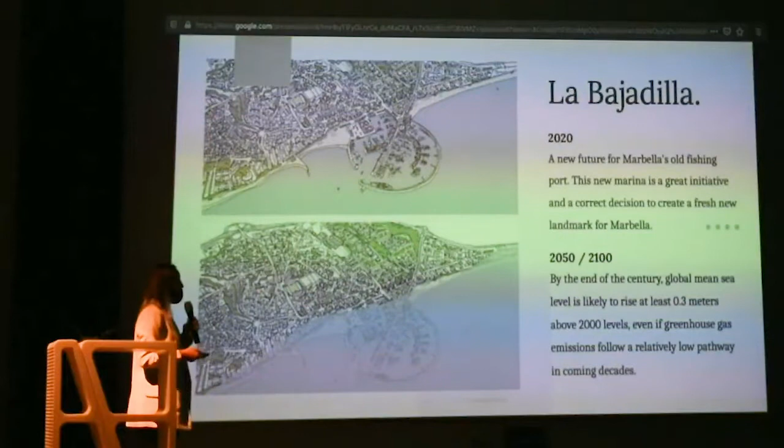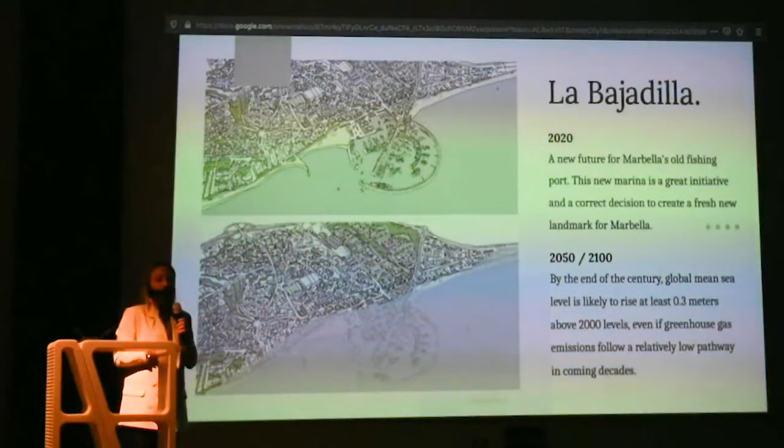One thing that affects this new development in the future is climate change, specifically sea level rise. By the end of the century, global mean sea level is likely to rise at least 0.3 meters above 2000 levels, even if greenhouse gas emissions follow a relatively low pathway in the coming decades. 0.3 meters may not sound like a lot, but for the coast of Spain and throughout the world, it will create major damage.

Sea level rise is affected by CO2 emissions, higher atmospheric temperatures, melting glaciers, and water expanding when it's warmer. The average temperature now, in 2020, is 28 degrees. In 2070, it will be 33 degrees, and in 2100, which is my goal and focus year for this project, it will remain around 33 degrees Celsius.

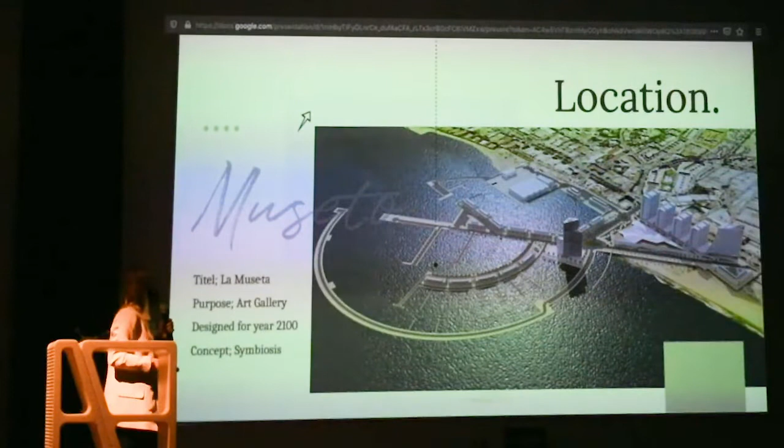I chose my location on this plot carefully, thinking about climate change and sea level rise. I chose a plot that is 10 by 30 meters, located at the end of one of the port's arms. The purpose of this building is an art gallery.

I chose art gallery because art has always been within human existence—think about cave drawings, for example. Art in 2100 will be something completely new: we will walk into the art, creating a completely new connectivity between the artist and the viewer.

The future is uncertain, so we have to prepare for many different possibilities. One thing is certain: art has always and will always be about creativity, connection, and communication. The more social we are online, the more we will crave human offline interaction and storytelling that art delivers. Therefore, I believe art and gallery exhibition space will be part of this future, also preserving history.

My concept is symbiosis. I chose this because I wanted my concept to connect with sea level rise and our location by the coast, so I chose coral as my concept. Coral reefs are very dependent on climate change—they will not survive if the water gets warmer and pH levels change.

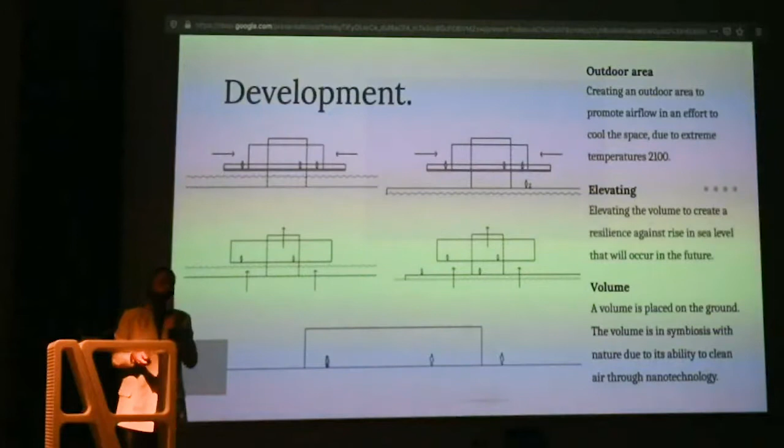For my development, I started with this 10 by 30 plot located on the ground. But because of sea level rise, we have to elevate it, making this building resilient against that end result. I'm also creating an outdoor area which promotes airflow into the building and opens up for viewers to look outside as well.

Further into the development, I'm also opening up the middle part of the building, where you transition from ground floor to first floor, to create a more open, airy environment. This is where my symbiosis concept really shows.

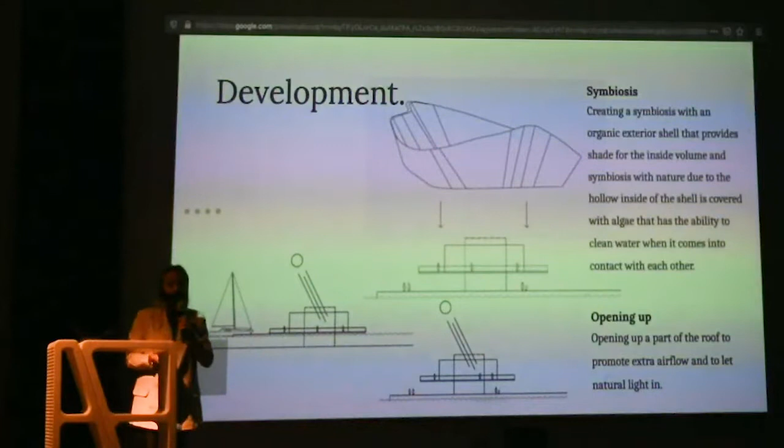Because of the hot temperatures in the future, we don't want to be exposed to the sun, so I created a shell that will surround this linear structure inside. Here you see the symbiosis between an organic shell and a linear structure—contradicting in form, but working together.

This shell will also host algae inside this hollow space, which will have the ability to clean water and create a live wall, or a live water filtration wall.

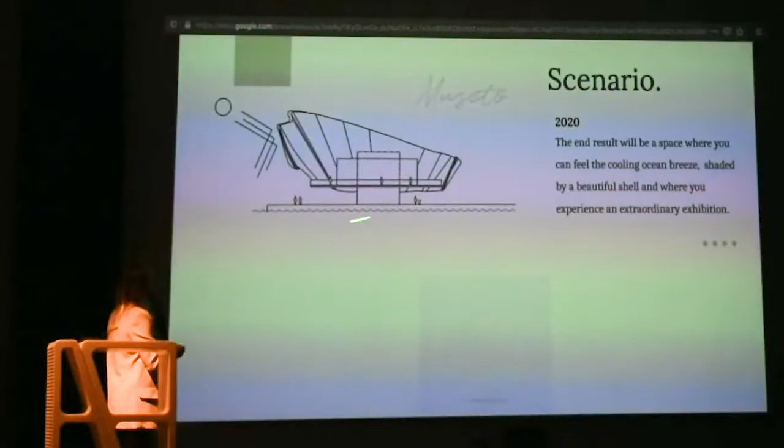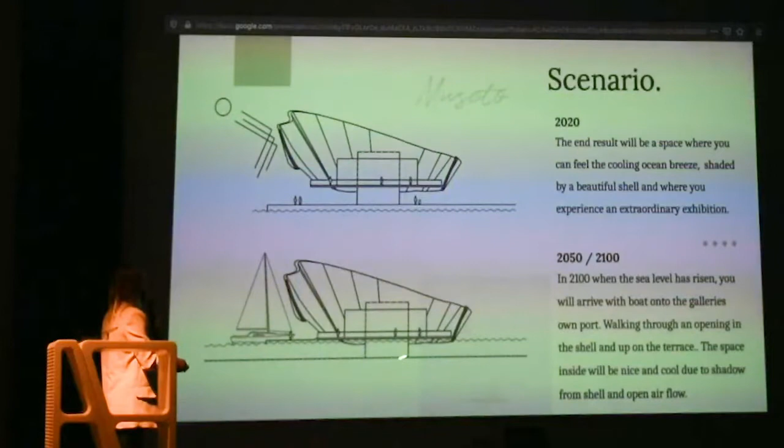Looking into different scenarios: in 2020, the sea level will be below, and you will still have the port and enter underneath. But in 2100, sea levels are rising and you won't be able to utilize this bay space because it will be submerged, so you will enter through an additional dock instead.

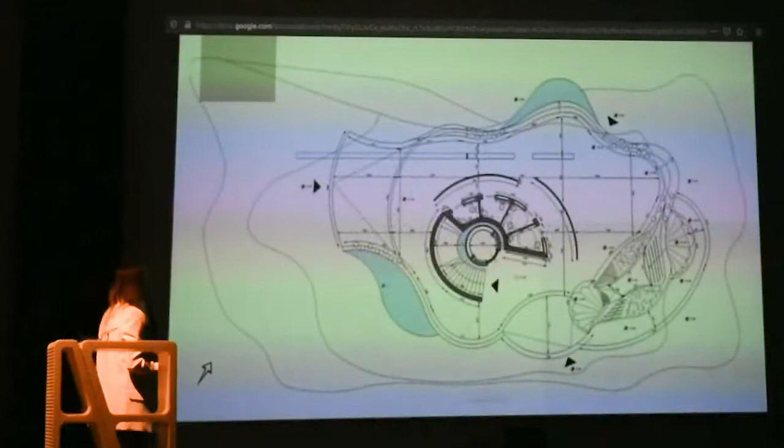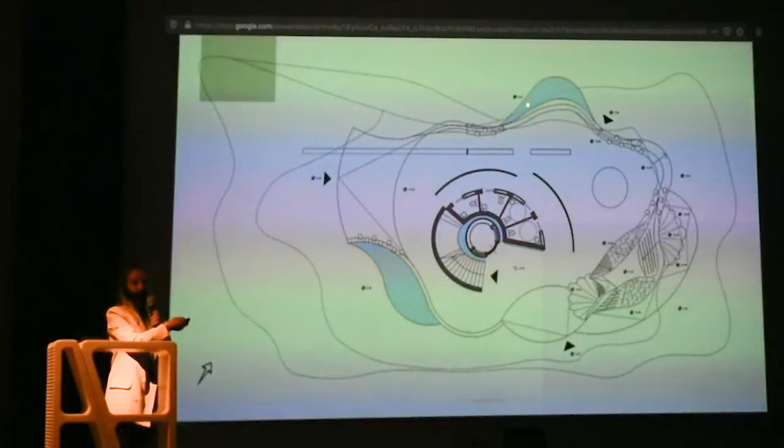Going into my building, coming from the port, you will see a curved structure around the building, almost like carved-out steps, created with seating and playful ponds that reflect the surroundings. You will actually walk past the building first to see it in its surrounding elements, and then walk into the main entrance.

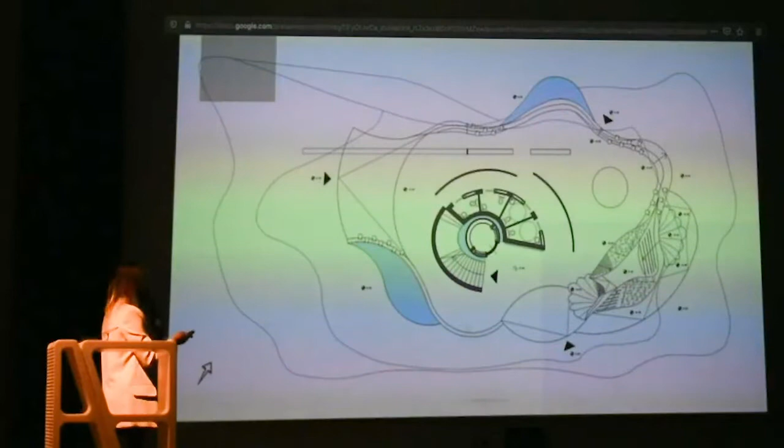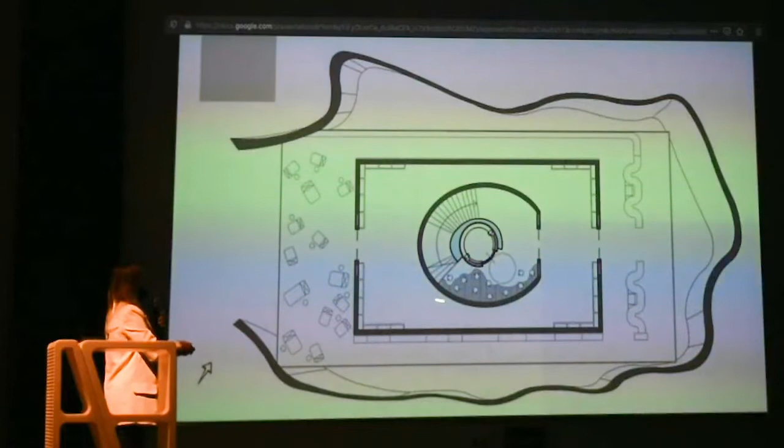You walk around in a playful setting with public bathrooms and a playground, then walk up the stairs or take the elevator to the first level. Entering the first level, you find yourself in an organic curved room with an open ceiling and a lot of seating.

From this room, you exit into a very linear, squared room, with two exits leading to the terrace area that goes all around this inner space with different kinds of seating. You can enjoy the view down to the plaza and the shell, and later a panoramic view of the ocean.

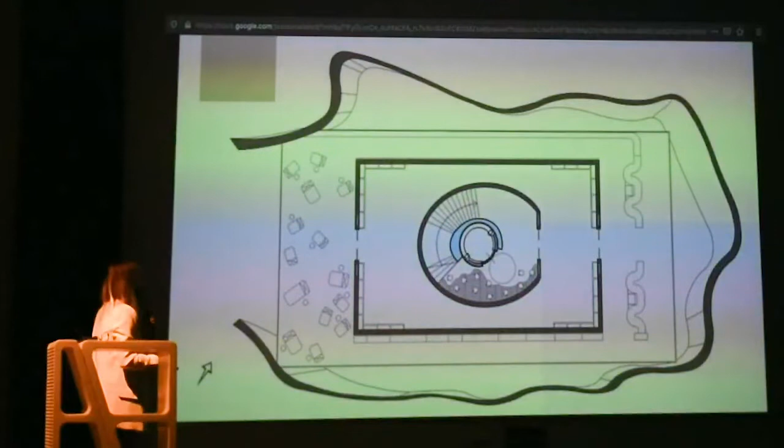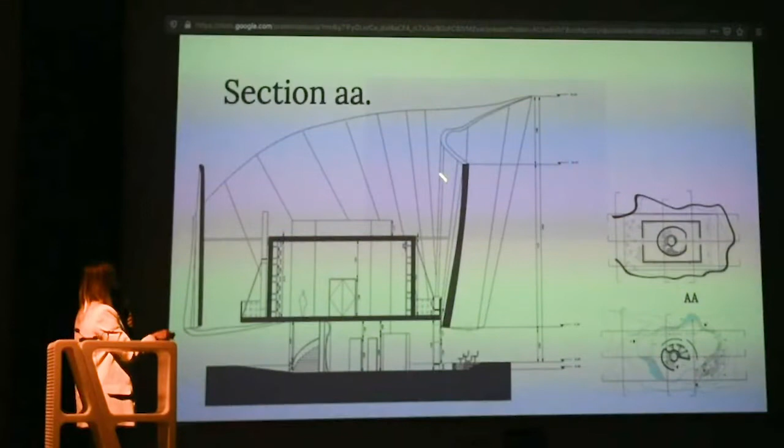In this image, you can really see the difference: going up the stairs, finding yourself in the linear squared room, and then going out to the side of the terrace, where you enter a whole different space with the shell around you.

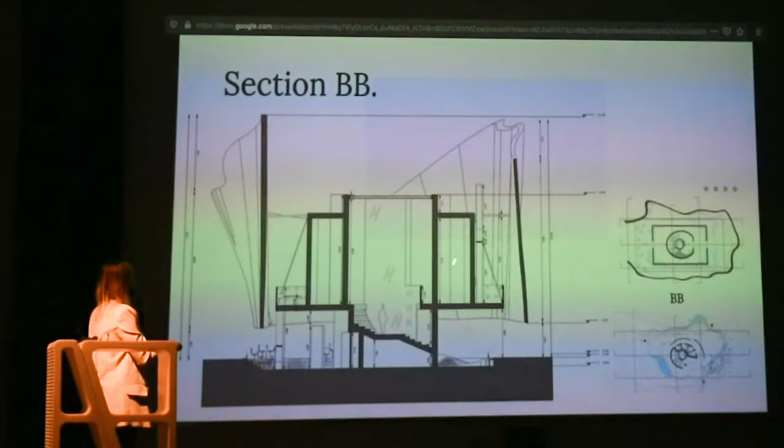This shows going from this open high ceiling into this squared room with lower ceiling height, creating a different perception of space as you walk through the whole building.

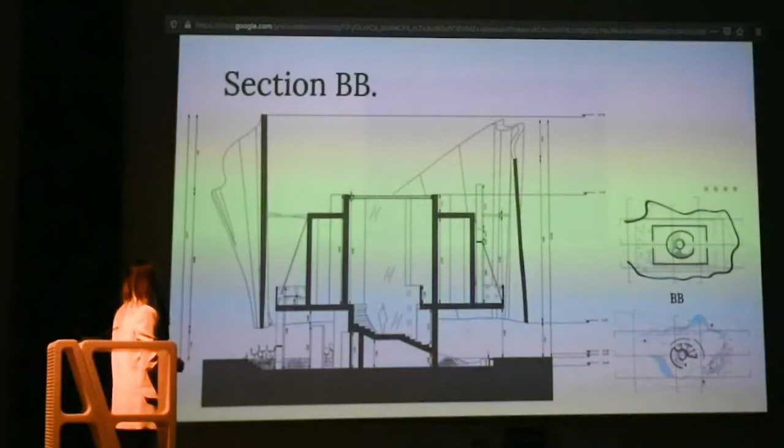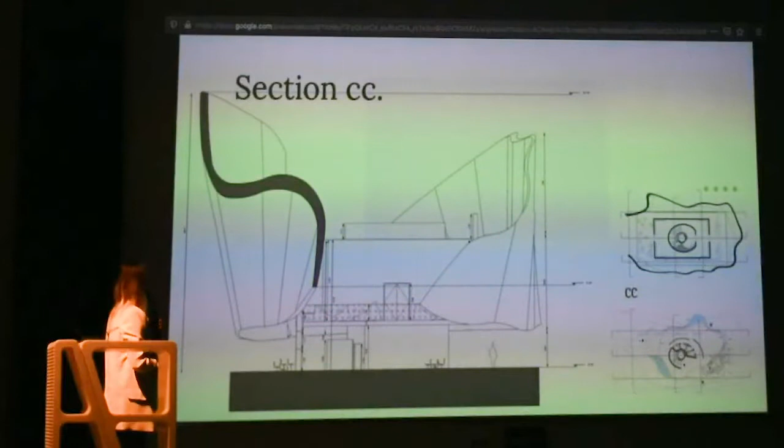This is where I've cut the shell, but you can see the inside structure together with this very organic shape and its symbiotic relationship.

Here you also see better. You're entering a high ceiling, you exit into this low ceiling height, tight area, and then you can walk out to this open space terrace with a shell. You can see down to the plaza and enjoy the view.

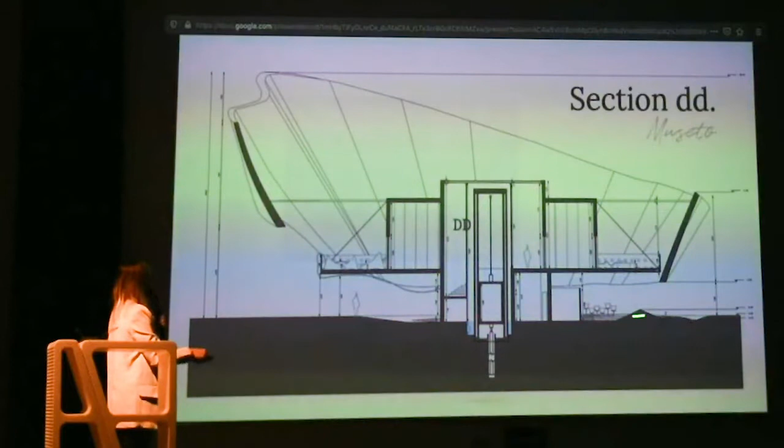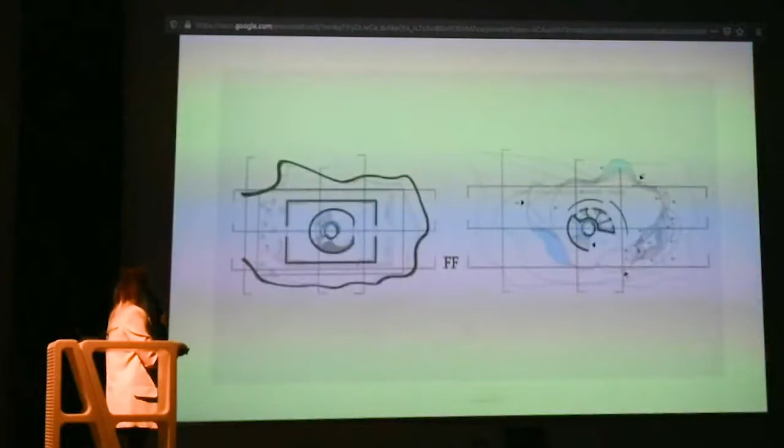The same here. Now we have a curved element connecting ground floor to the first floor, taking you all around the building to the other side, continuing, connecting the whole space like a golden thread.

So when designing for the future, we have to think about materials. We have to benefit Earth. So what I'm using is nanotechnology concrete that cleans the air from pollutants, and algae that cleans water as it runs through, creating a living water filtration system. I'm taking into consideration that Earth doesn't really need us. We need Earth, so we have to design for this.

Materials inside will be a combination of walnut wood, bioconcrete, galaxy marble, white marble, to create this beautiful symbiotic contrast. And WPC, which is wood plastic composite for outdoor furniture, and then tile slabs of recycled pearlescent polycarbonate to cover the shell.

So when you enter here, you walk past the building and you will enter down to this ramp. You see the carved out seating and step downs, public bathrooms. It's accessible for everyone. The future will be accessible for everyone, and I want to implement this into my building. Seating for relaxation. We have a fun ceiling design that creates an alive building and a view 360 degrees around.

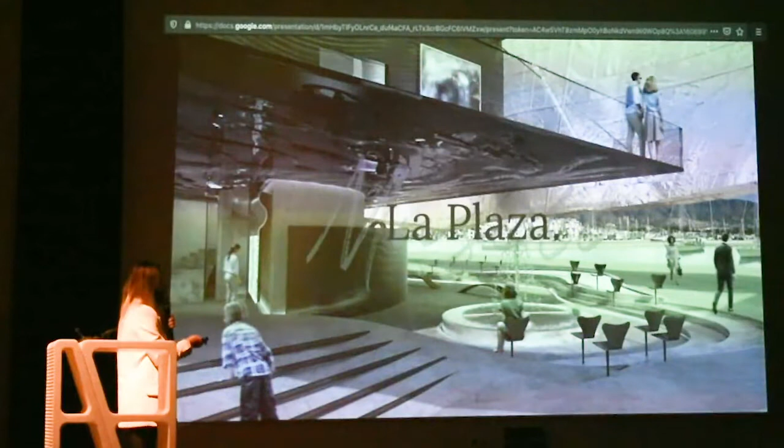Coming down to the other side of the plaza, where you see a panoramic view. You're underneath this shell, and here you can really see the combination of the organic shell and the linear inside structure.